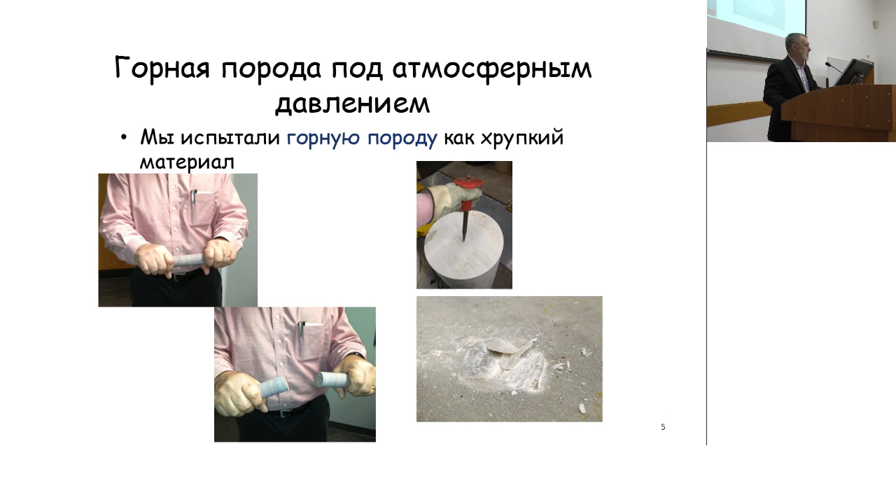One thing we're going to see is that a long time ago people made hypotheses about what happened down hole. They assumed that the rock was brittle, and that was a mistake. Basically, rock is made up of hard grains that are glued together. This is a piece of sandstone, and you can imagine it like taking beach sand and somehow gluing all the grains together. That's what the rock is, a granular material.

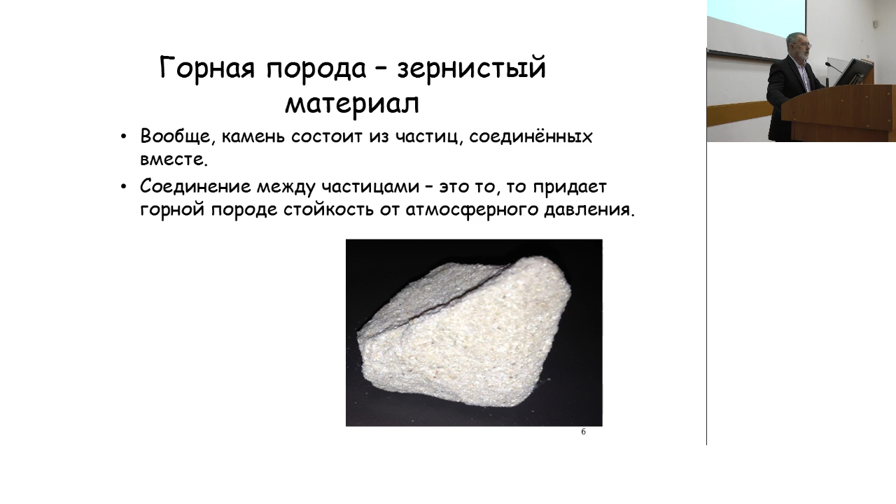There are two basic classes of bits we use to drill rock these days. One is what we call a drag bit, which rotates as shown in the picture, and part of the bit just scrapes on the rock and shears it away. There's an old bit shown on the left, from a little over 100 years ago, and the one from today. The other kind of bit is a rolling cone bit, sometimes called a tricone bit. Those cones are just wheels that rotate freely. As you put a lot of force on the bit, what we call bit weight, to make it drill, that force is concentrated on a few teeth and it crushes the rock.

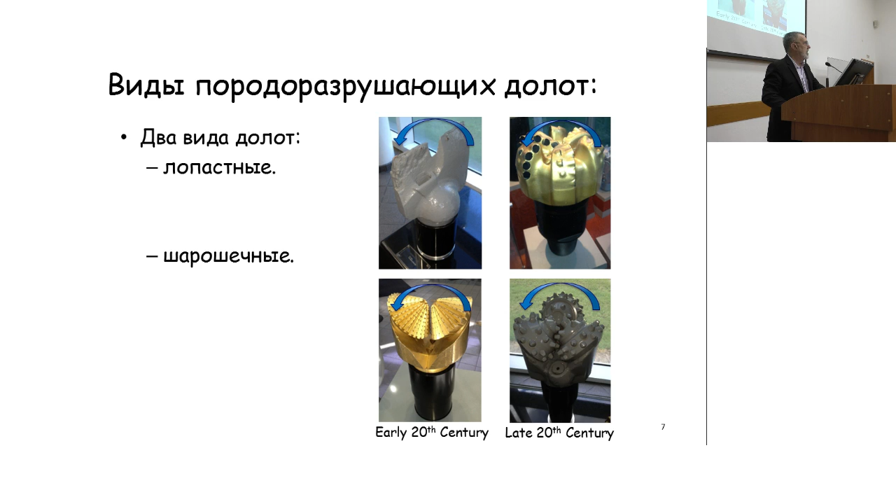So, two kinds of bits. We'll talk about each of them a little bit. Again, the one on the left at the bottom is one from about 100 years ago that a guy named Howard Hughes in the United States invented, and that was the beginning of Hughes Tool Company.

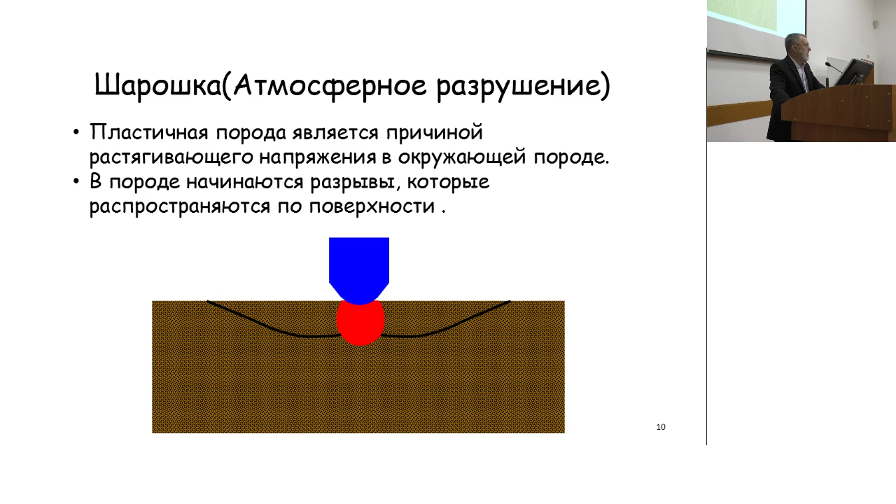Let's think about what would happen at atmospheric pressure if we indented a rock. The blue thing here represents a rock bit tooth, and the brown or amber color represents the rock. As the tooth begins to penetrate the rock, it crushes the rock immediately under it, shown in that red zone. That crushed material is like a plastic material that wants to flow. It has less strength than the elastic material, but it's constrained by all the elastic material around it to keep it from flowing. As we continue to indent, if we get the pressure high enough, it can make a chip. It will drive a long crack that starts in the crush zone and propagates off the surface, and then big chips of rock will fly away. This is what we'd see if we could watch drilling in a laboratory.

This is a picture of a test facility from 1955. Somebody asked me earlier today how I got started in this area, and the answer was that my father had been in it before me. He worked for Exxon and did drill bit research. About the time I was born, two years after I was born is when this picture was taken, but around that time he came to Houston and actually used this very machine and some tests they were doing back then. But that's not part of my presentation, just a personal piece of information.

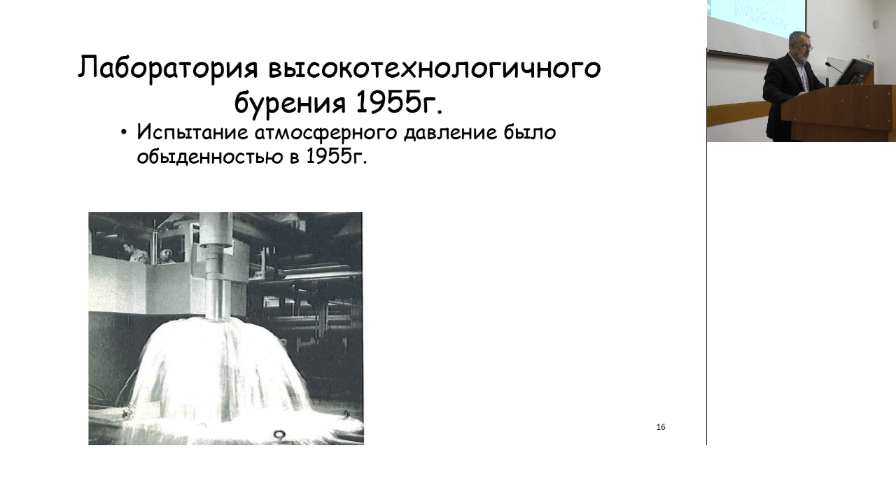I like this picture because it was part of a recruiting brochure from the 1950s where this company was basically saying, look how great we are, we've got this great lab, why don't you come work for us and do research. At that time they assumed there's a big rock down there at the bottom that you really can't see. There's a drill stem coming from the ceiling that you can see, where you can put a bit and rotate it to drill in this big rock. The water all around is to clean the rock. But they assumed that this sort of atmospheric pressure drilling would be representative of what happens down hole.

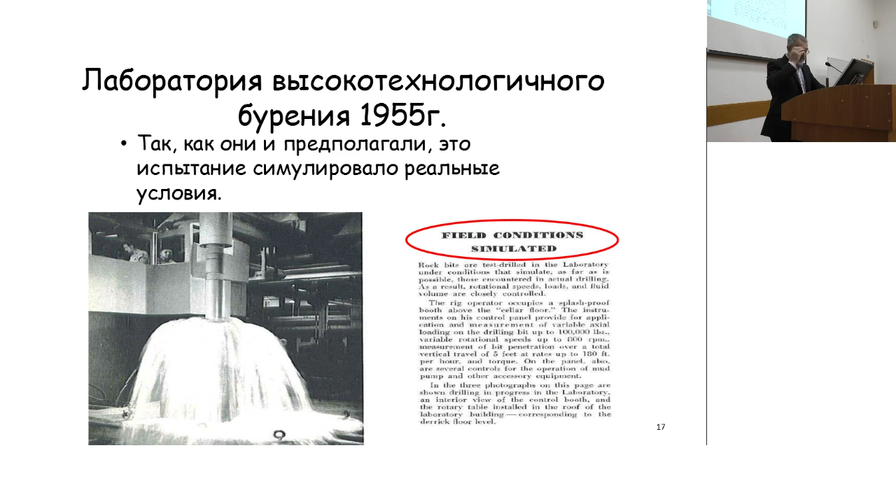If you were to read the English here, the first part talks about how it simulates downhole conditions as far as possible. But about that same time, people began to learn that if you retrieved a core from deep in the earth that you had been drilling, and then drilled on it in the laboratory, it was much easier to drill in the laboratory than when it's deep in the earth. So that raised the question: why is it so hard to drill when it's deep in the earth? That's the mystery I talk about. There's still some mystery left to it. We understand a lot better today than we did back then, but they recognized that the rock was harder to drill if it was in the earth. The question is why? Answering that question is pretty much what I'm going to be talking to you about in this presentation.

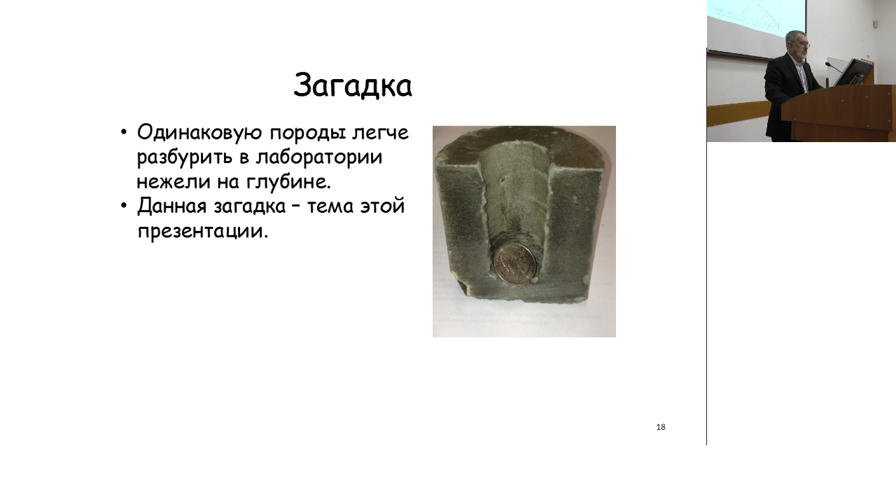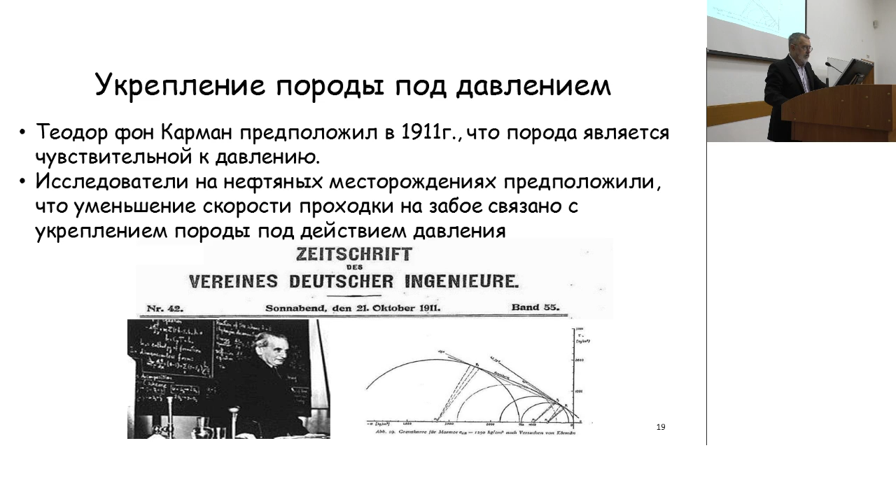Even back then, and way before then, people had realized that rock was a pressure-sensitive material, people who worked with rock. This guy here was one of the heroes that started using this sort of analysis. In the 50s, when the oil field researchers started getting into this, they used this type of analysis to model the drilling. So this is going to talk about some tests that were done.

In 1955, a guy named Bob Cunningham, who I worked for when he was old and I was young, built this machine shown here as one of the first high-pressure microbit test machines. It's because they realized they needed to test rock under pressure to make it act like it is downhole. So he built this machine that would use small bits, as I'll show in a moment.

He actually did tests on it to measure the rate of penetration, meaning how fast you can drill in the rock. And then he also modeled the rate of penetration with the Mohr-Coulomb theory that people were using at that time.

This is a little more information on the test. You can see the microbit at the bottom, that's about 3 centimeters, much smaller than an actual bit, because back in that day... I see that the graph on the right actually has a little bit of a glitch to it, I apologize for that. The brownish looking stuff is the rock, it's kind of removed. But at any rate, we couldn't build huge pressure vessels in those days. Didn't have the money, or I guess the technology. So they built a small version.

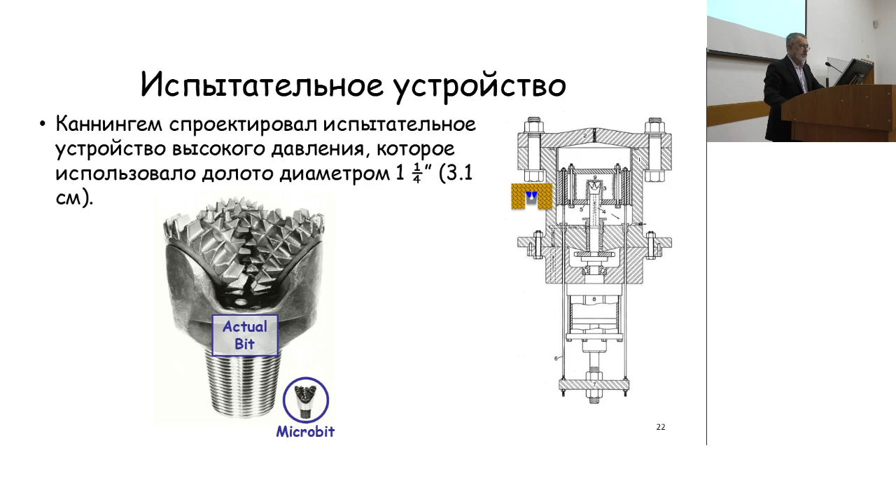They used this Mohr-Coulomb model of a plastic material to explain what they hoped would explain the mystery. I want to take just a moment and talk a little bit technically here about what the Mohr-Coulomb model represents. We can plot it in the space of hydrostatic stress on the horizontal axis and shear stress on the vertical axis, and a circle that has its center on the horizontal axis represents a stress state.

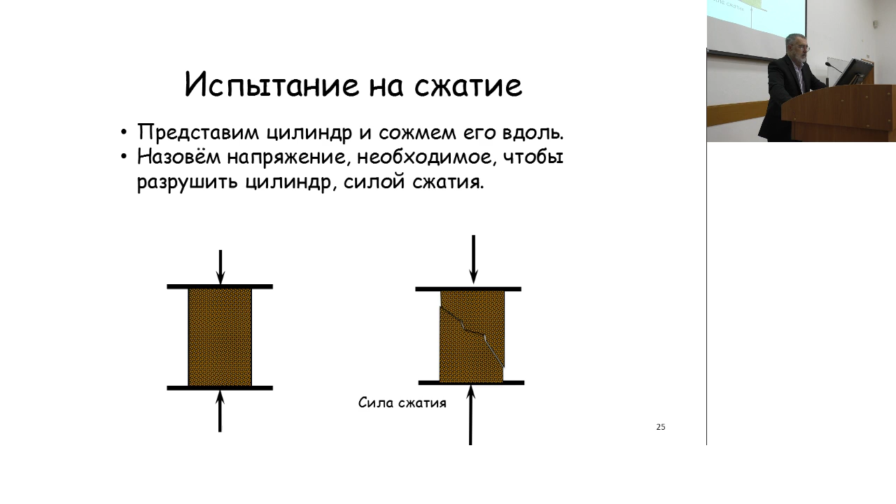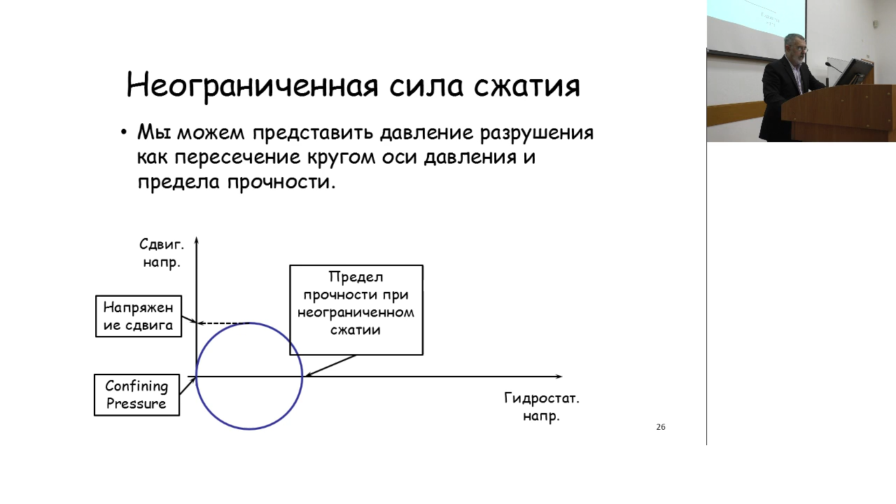Imagine if we did a test where we took a cylindrical rock specimen and just squeezed on it axially, kept raising the pressure until it broke. If we measured the force at which it broke, we'd call that the confining—well, it'd be the unconfined compressive strength in this case. We call it compressive strength, that's the word I was looking for. We can plot that by putting the confining pressure on the horizontal axis and the actual pressure at which the rock fails. Then we can draw the circle in there as I described, and the height of that circle represents the shear stress required to fail the rock. Well, now that was for an unconfined test.

Let's imagine we take the same piece of rock, and this time we put pressure all around it, and then we increase the axial force to find out how much force it takes to fail it. What we'll find is it takes more force to fail the rock when it's under compression.

So we can plot again the confining pressure shown at the left, and the measured compressive strength shown at the right, and the circle a little bit higher than it was is a bigger one, meaning more shear stress is required to shear the rock. And we can even take this to higher pressure, and then we'd find that the rock gets even stronger, and the shear stress required to fail it would be even stronger.

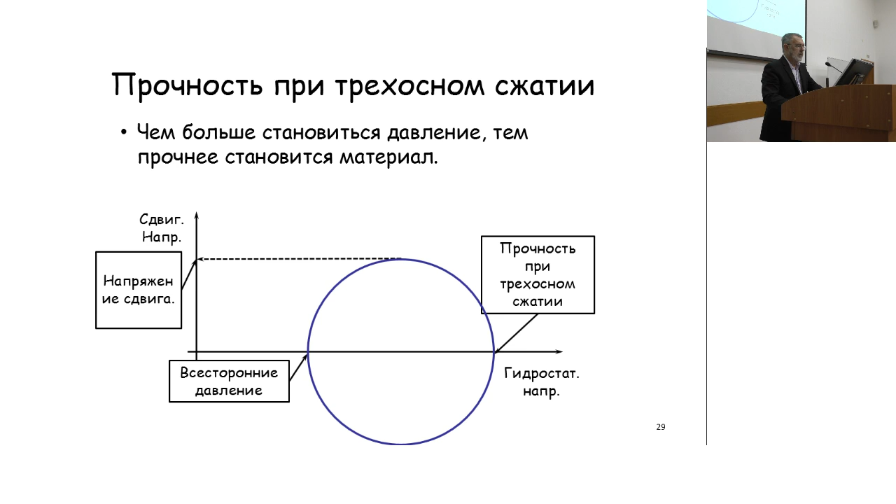So we can do a bunch of tests on pieces of rock at different pressures, and get a circle from each one of these tests, plot the circles together as shown there, and then plot through it what we call a failure surface. What that failure surface means is if the stress grows big enough such that it touches the failure surface, then it's defined to be failure.

And we can put mathematical parameters on this so that we can solve these things mathematically. This is basically the equation that Cunningham used, and I'll show you some of his results. It's still the basic equation that we use today, maybe in a slightly different form. Maybe we use a Drucker-Prager material rather than a Mohr material, but it's a similar sort of thing.

The theme of this is that this model here does not explain everything, and so there's still some of the mystery left.

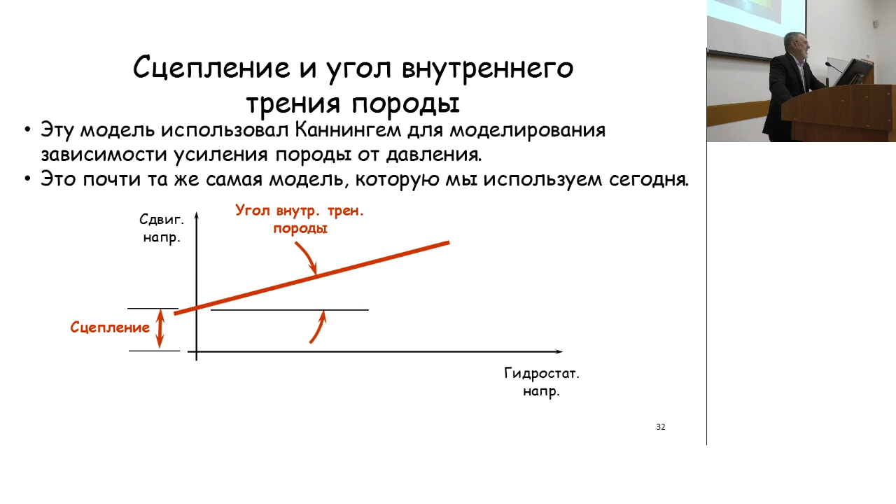If we put a shear stress on this thing and push it, we'll find out that there's a volume expansion as we do. And there has to be, because the grains need to move apart a little bit and move past each other, as is shown by this simple example.

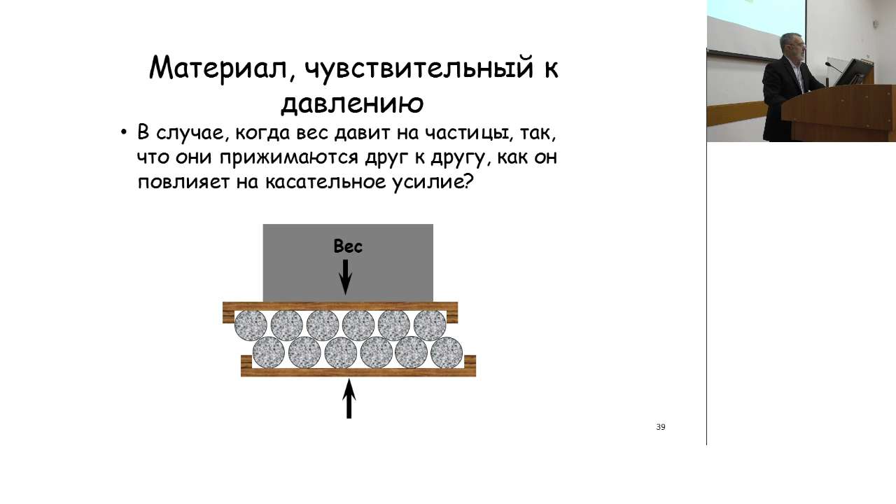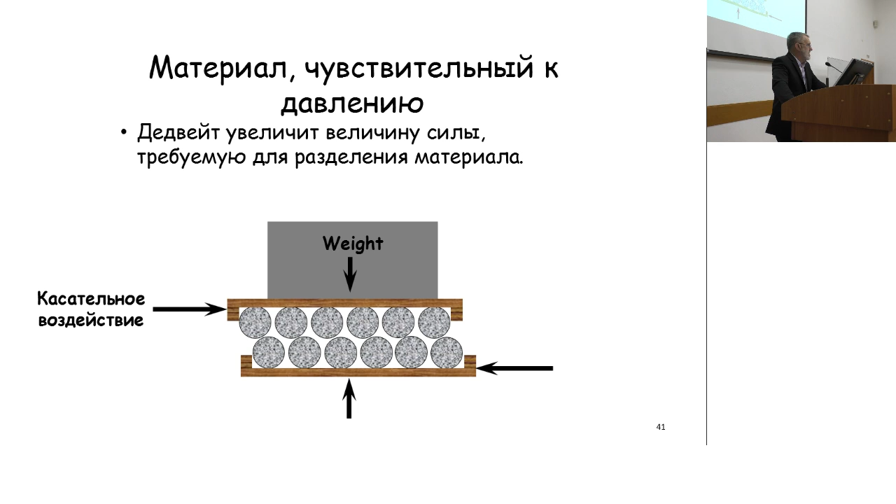If we put a weight on top of this and ask how much shear stress, well, it takes more shear stress to fail it because the weight resists that. But there's still a volume expansion, and the idea that the rock expands as you shear it is going to be really important in this discussion, so you need to remember that.

So this shows that we have volume expansion, and the higher shear... the weight, which it says in English there, is similar to the confining pressure. Remember I talked about doing a test and putting pressure all around it. The weight is like that in this simple example, and the shear force is like the shear force.

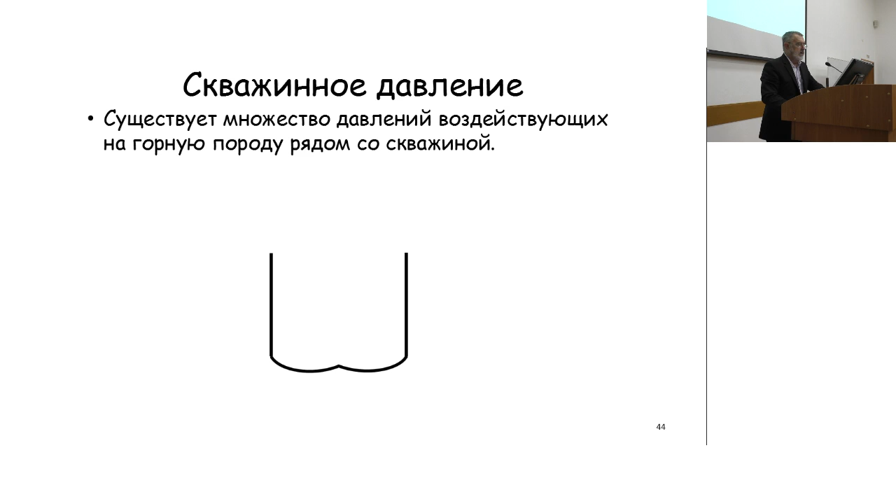So there's a lot of different pressures downhole, a lot of different stresses downhole, and I want to list them here. There's the overburden stress, basically due to the weight of the earth. When you get deep, maybe 3 or 4 or 5,000 meters, there's a lot of weight of the earth above it, pressurizing the rock.

And there's a confining pressure, people usually call it. It's a lateral stress that's usually somewhat less than the overburden pressure. Then as we drill the hole, we fill it up with mud, and the mud is very heavy, made so on purpose, so that the gases and things in the earth won't blow out. It keeps everything together, but the mud is usually lighter than the overburden pressure. And finally, there's the pore pressure.

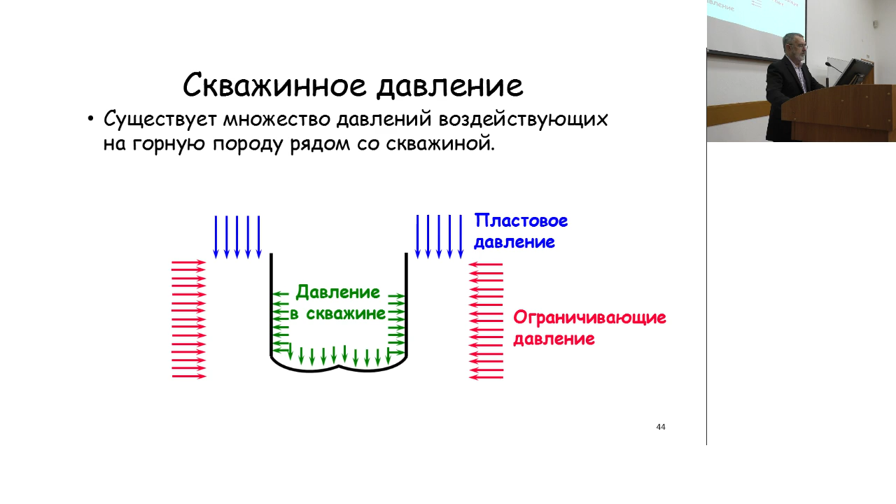So there's all these different stresses, and the question for Bob Cunningham back when he did his first research in the 50s, is which of these pressures governs the rate of penetration. They did a lot of tests with that microbit rig, and they varied each of these independently, and what they found was that what they called the differential pressure is what governs how fast the bit drilled. The differential pressure is the difference between the borehole pressure and the pressure in the pores.

As the differential pressure gets high, the rock becomes more difficult to drill. Now, many rocks are permeable, meaning fluid can flow into the rock, and we don't want that to happen in the earth. We want the fluid that we put in the borehole to come back out of the borehole, not go into the earth.

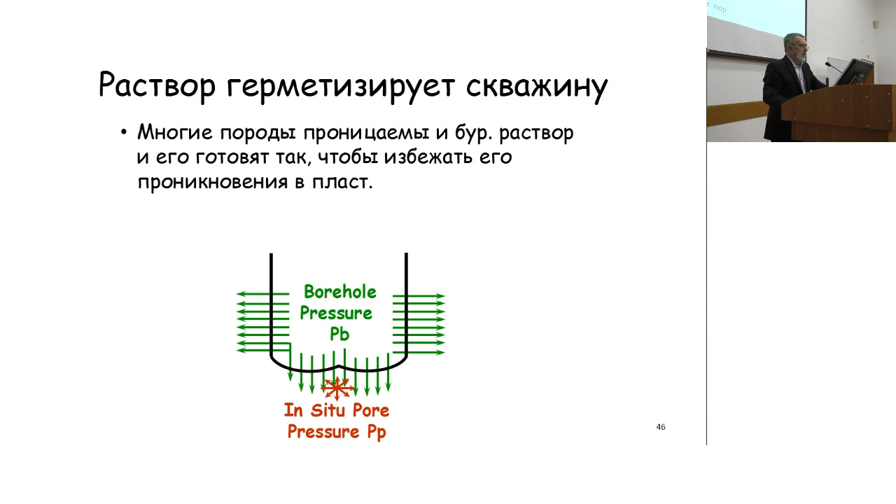So we formulate drilling muds such that they inhibit that, and they form a filter cake around the edge, sealing off the permeable rock to prevent drilling mud from going into the formations. That's very necessary for drilling, but it also turns out to be detrimental for the process of failing the rock, as we're going to discuss in this lecture.

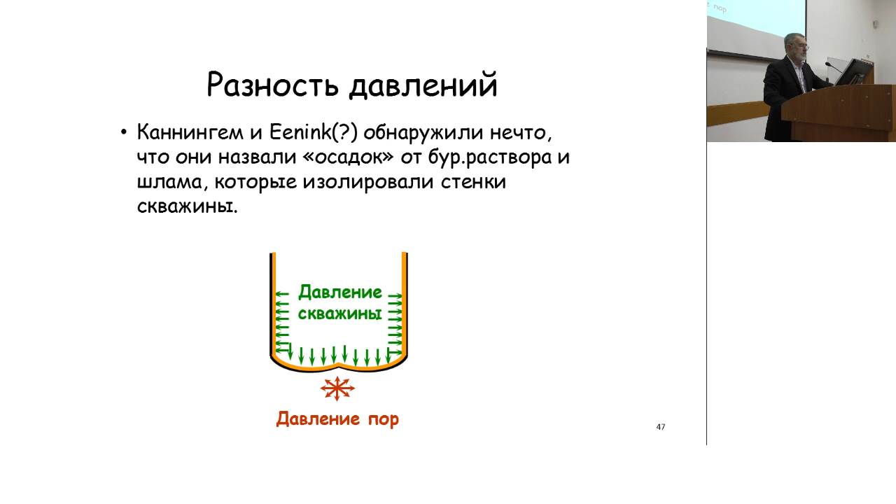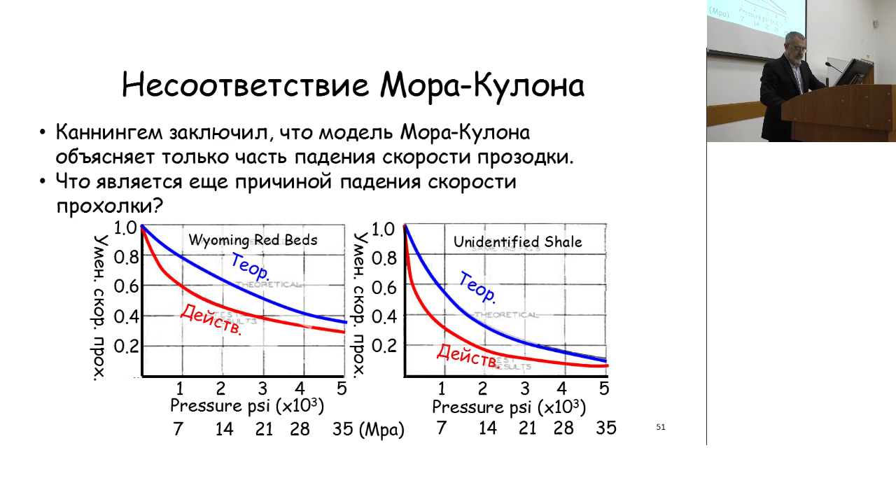That's the drop, and you can see it in red there — that's what they actually measured in their test machine. But the theory, the Mohr-Coulomb theory they were using, didn't predict as dramatic a reduction in rate of penetration as they actually measured. That raised the question of why. Cunningham ended his thesis basically pointing this out, making the observation that the Mohr-Coulomb model only explains part of what's going on. There's something else going on that remains a mystery.

At that point, a lot of researchers around the world — SPE already existed in that day — and all these researchers would publish their data in SPE papers so they could share the data. At any rate, a lot of people started working on this problem.

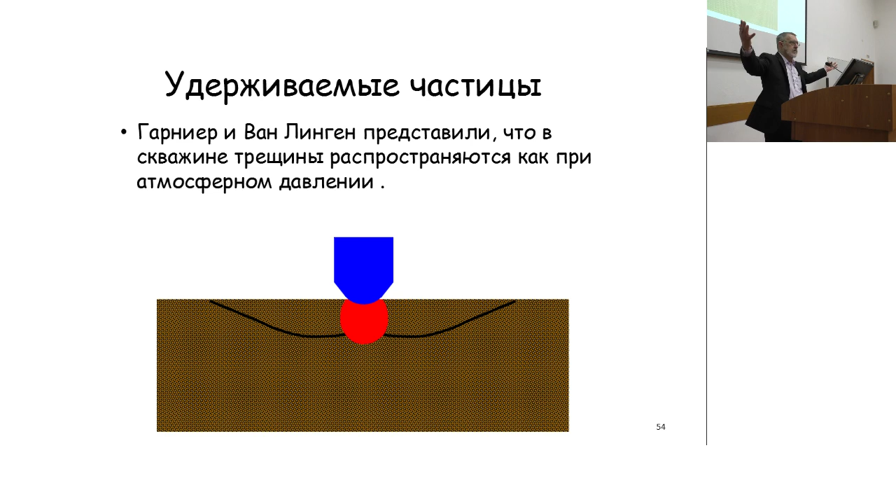Here's a couple of guys who tested in 1958. They built their own microbit rig, wanting to find out what's responsible for the increased reduction in rate of penetration. They came up with a theory they called chip hold down. They imagined — and this is where I think they went astray — that under pressure a long crack grows like it's shown in that image there.

But under pressure the chip can't go anywhere because there's fluid pressure holding it down — like the borehole pressure, with a filter cake shown there. If there's high pressure on that chip, it'll be holding it in, and if we're talking about pressures of 100 megapascals or so, there'd be a tremendous force holding that chip in place. So they call it chip hold down.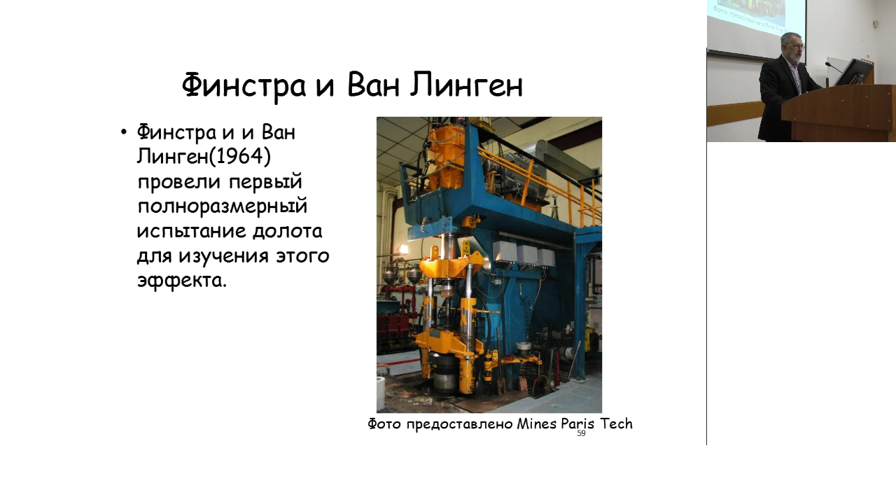Then another researcher began working in the 60s using the first full-size test facility. In this facility, they could put a full-size drill bit, put a relatively large core of rock in there, pressurize it, and drill on it. Today we have machines much bigger than this, but this was for their day.

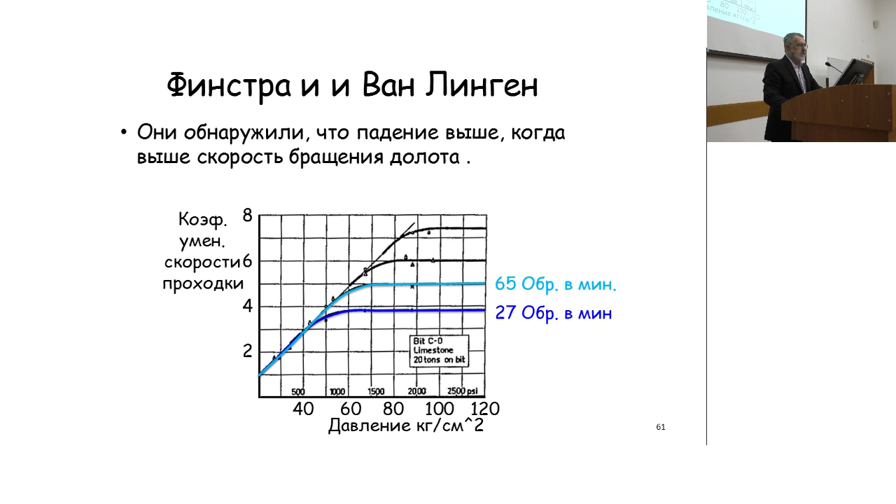They found that the rate of penetration reduction was rate sensitive. Here we have pressure across the bottom, and the vertical axis is the rate of penetration reduction. What they found is if they did a test at 27 RPM, starting at zero pressure, you see the pressure rising as you move to the right, but it reaches some limit and stabilizes at that point. They found that if they go to a higher RPM, it would follow the same path of increase and reach some other highest value, and similarly on up to 315 RPM.

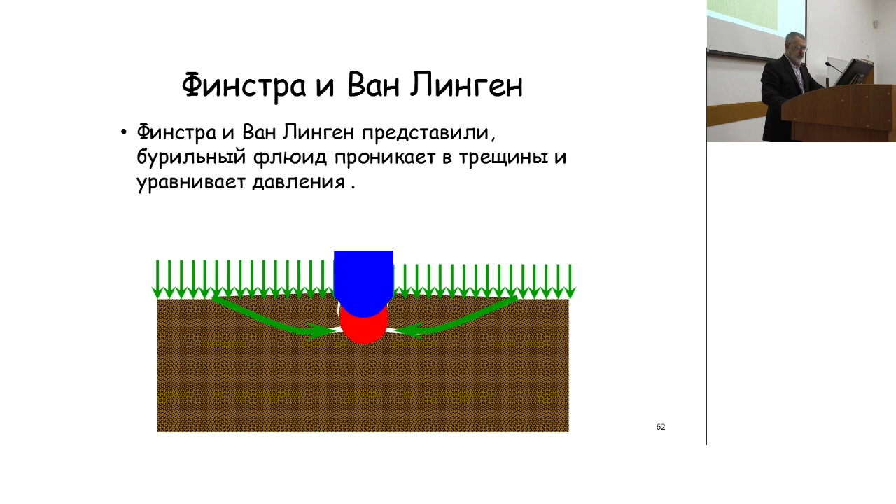When people started studying drag bits, which would have been a few years after what I've been talking about, they noticed that drag bits, shown here as a diamond cutter moving from left to right, with the brownish or orange material being the rock.

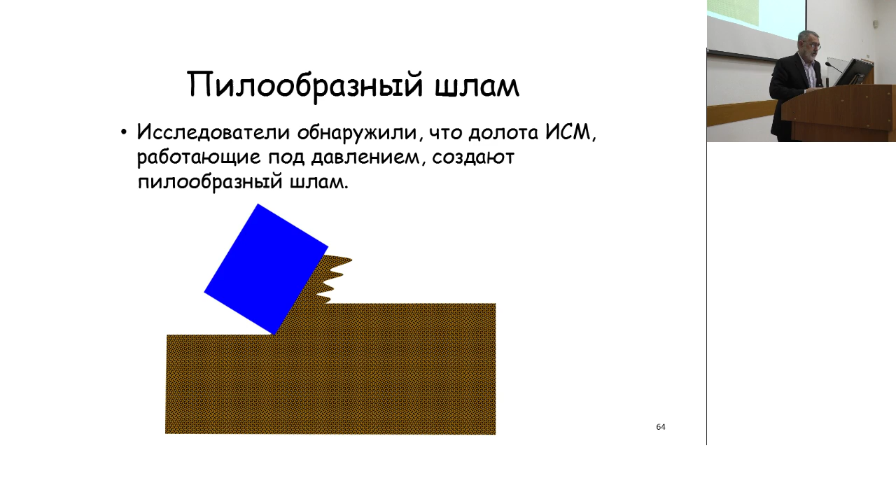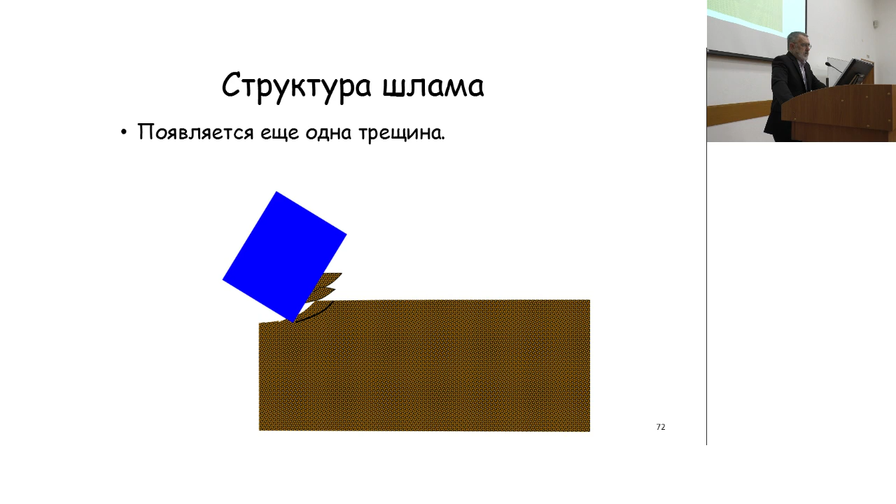People assumed, and I was involved in it by this time, this would be the 1980s, that as we cut with a drag bit, we're doing something over and over. We're driving a long crack, like shown there, and then that chip moves up a little bit, and the cutter advances, and we drive another crack, and it moves up a little bit. So you get a stack of chips of rock. That was the hypothesis, and people believed that for quite some time.

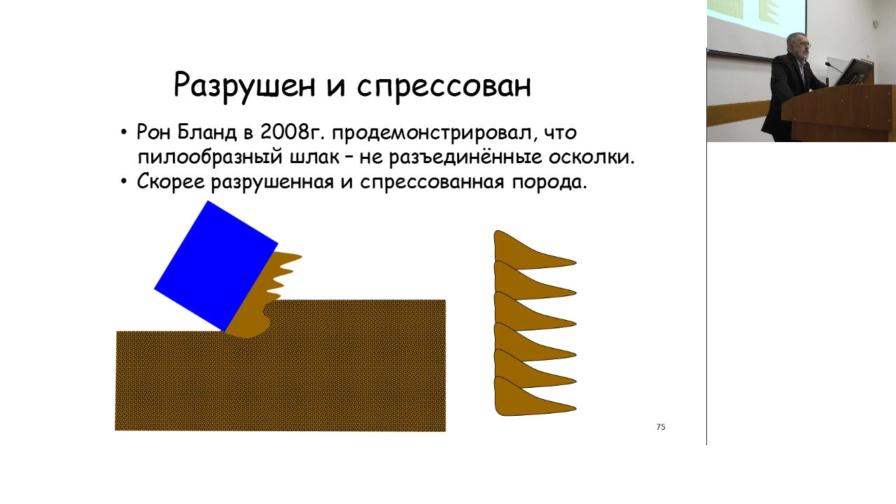But back, actually not too long ago, about 10 years ago now, a guy named Ron Bland discovered that there's no stack of chips. The material is entirely crushed and extruded. So I've changed it to a tan color there to represent the crushed area. As the cutter moves from left to right, we crush all this and then extrude it up in that direction, and it comes out in the sawtooth shaped type chip.

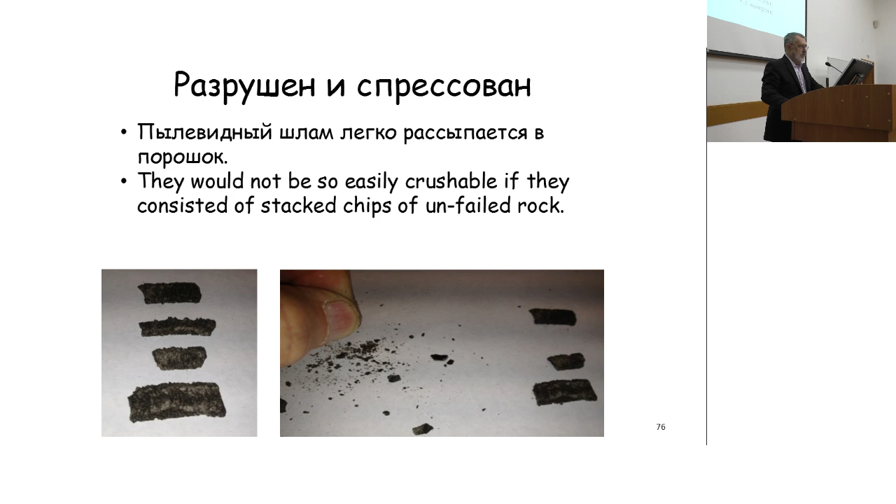One simple way we know this is you can take these cuttings after they're made and grind them up in your finger. If there were stacks of chips of unfailed rock, you wouldn't be able to do that - you'd break it into the stacks, into individual chips. But it breaks into small material, and Bland quantified this for both tricone bits and PDC bits and showed that they both crush the material entirely.

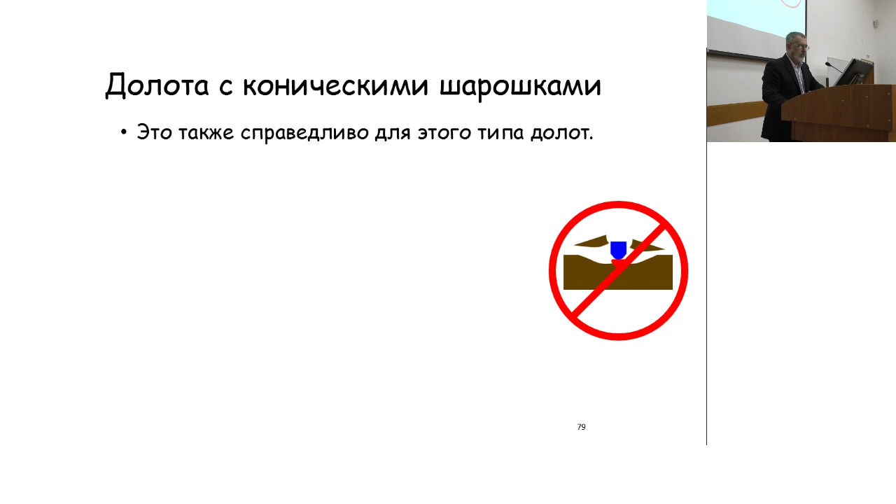So this is not what happens here - this sort of brittle failure that we might think about with rock, long cracks being driven in it and big chips coming off - but rather there's a crushing and extrusion type process that goes on. And that's true not only for drag bits, but for rolling cone bits too. As shown at right, as a cutter goes in, it actually crushes a large volume and extrudes just a small part of that.

More recently we've done analysis of this, and this is an image from a discrete element analysis. Maybe you're familiar with that, but the amber colored balls, or orangish color, are representing grains that are glued together. In the mathematical model, they have a tensile strength - they're glued together.

Then the cutter, there's a cutter on the left that will be advancing. The amber balls, as I said, represent the original rock that's glued together, like I said in the first or second slide. These blue balls - the cutter is advancing, and it's breaking the bonds in the amber balls. Once a grain of the amber has broken all of its bonds, the computer changes the color to blue, so we can see what the crushed zone is. The blue is the crushed zone.

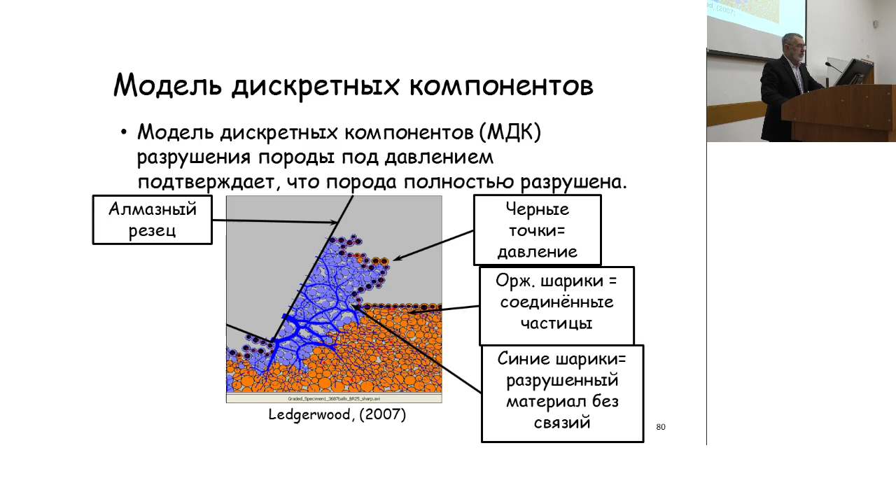The black dots represent the pressure boundary condition - that's actually a relatively complicated thing to know where the pressure is applied, but there's pressure being applied not only to the rock, but also to the cutting that's extruding up there. Finally, there's a PDC cutter moving from left to right in this image. The same thing happens with modeling the tricone type cutter - you can see a large volume that's crushed, and only a very small part of the rock that's actually removed in the indentation process.

When we set up a model like this, we know the rock properties. We can take a rock and do a test, and that would be the properties of the amber colored balls. We know the mechanical properties of the cutter, but this blue material is a third material whose mechanical properties we don't know. If we go with our gut, we'd say the blue material is probably relatively weak because it's crushed rock, just like a bunch of sand. But that's where we'd be wrong if we assume that.

The slides going forward actually show that in English, though I guess it'll revert to Russian as we go on in a moment.

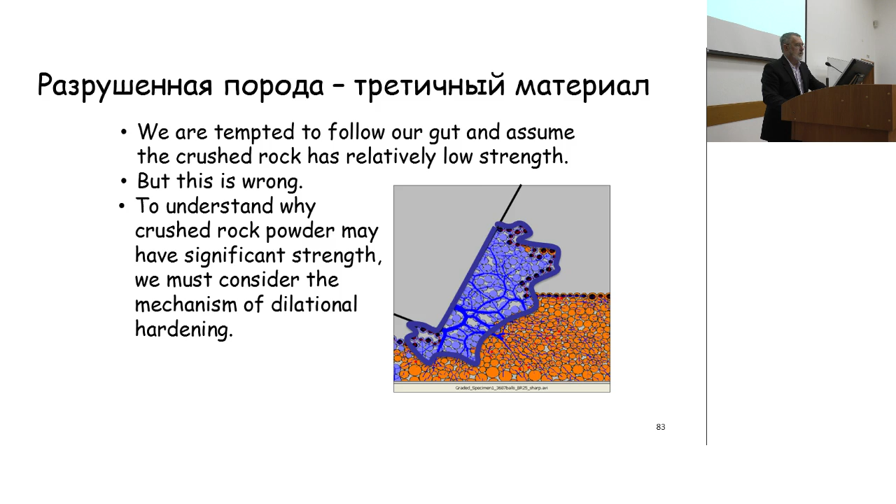In order to understand how the crushed material can have strength, we need to talk about dilational hardening. Dilation means something dilates, it expands. Remember when I talked about a rock, if you shear the rock it expands. Hardening means when the rock dilates, it makes it appear to be harder.

In this picture, the blue is a drag bit moving from left to right. The little fish in it is unfailed rock. There's borehole pressure and pore pressure. Remember that the difference between those two is what strengthens the rock itself.

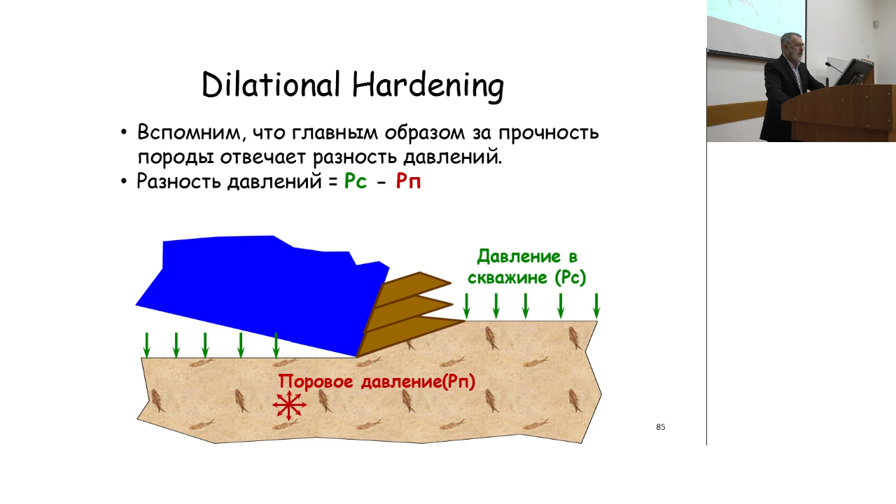But we're interested in the strength of this material in the crushed zone. What is that, and there's a pore pressure in it. So we really need to talk about the differential pressure between the borehole pressure and the pressure in the crushed zone as the pressure that strengthens the cutting.

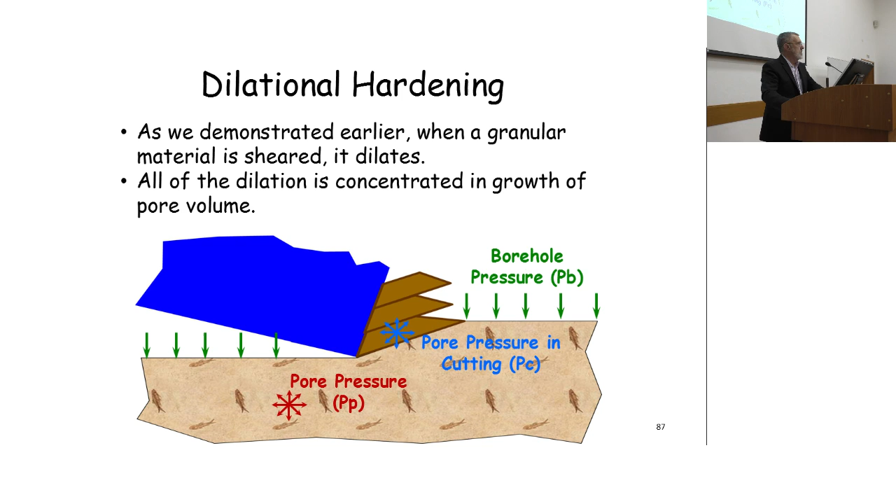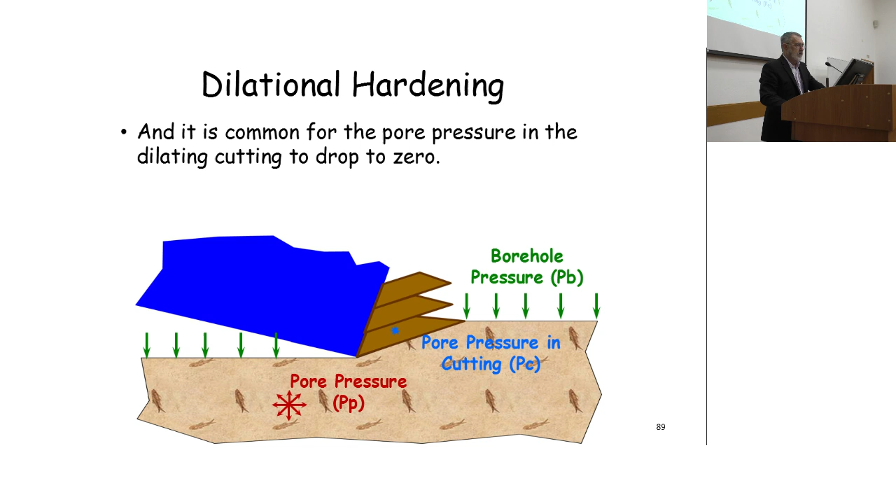So go back to the idea that as we shear the rock, it dilates, and all the volume expansion happens in the pores. The pore size is growing quickly, and as we do, we drop the pressure—you see the blue arrows getting smaller. It's been shown that we frequently drop the pore pressure to zero in that area due to the dilation that happens when you shear it. So the differential pressure in the cutting is the borehole pressure minus zero, which is basically the highest it can be, strengthening the cutting.

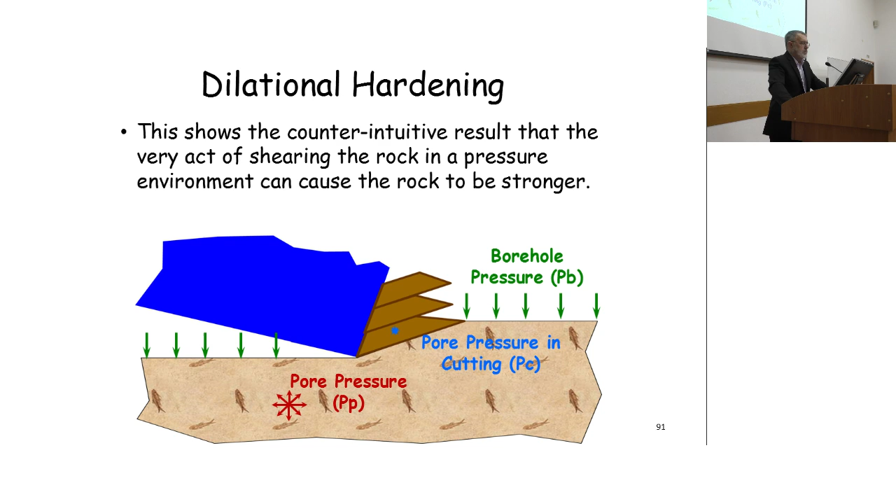This shows the counterintuitive result that as we shear the rock downhole with pressure, if the mud is right, as we'll see in a moment, it makes it very difficult to drill.

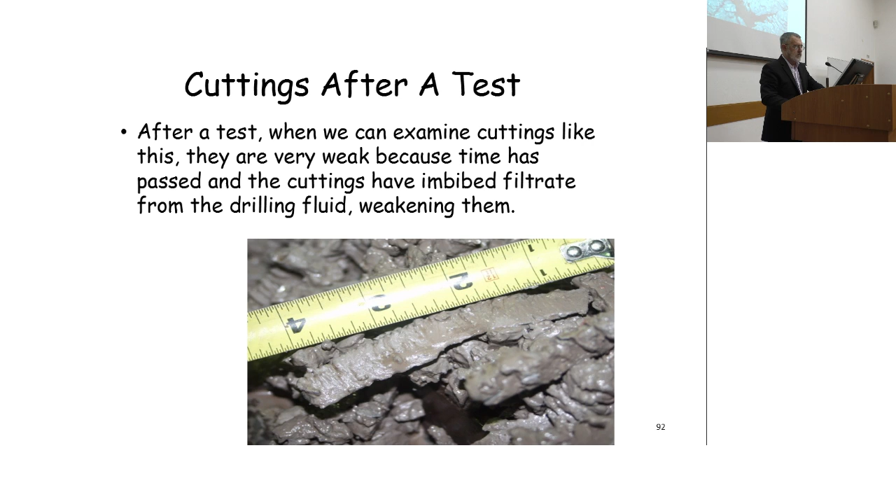If we take the cuttings after a test, as shown here—this is some shale cuttings—if we had some to play with, we'd see it's squishy. It's real weak, as we'd expect it to be weak. And we're tempted to imagine that's the same kind of strength it has downhole, but that's not the case.

If we want to evaluate the strength of the cutting, we can't use the cutting like shown in the previous slide, because that cutting was formed during the cutting process, then the test was depressurized and opened up, somebody got the cutting out, and several minutes passed, and a lot of fluid has gone into the cutting, making it weak. So by the time we can look at it, it's already weak.

So we really need some way of investigating the strength of the cutting at the instant it's created, because it only has strength for a very short time at that instant. The reason it has strength for a short time is because as time passes, fluid can get in there and raise the pore pressure on the cutting, weakening it.

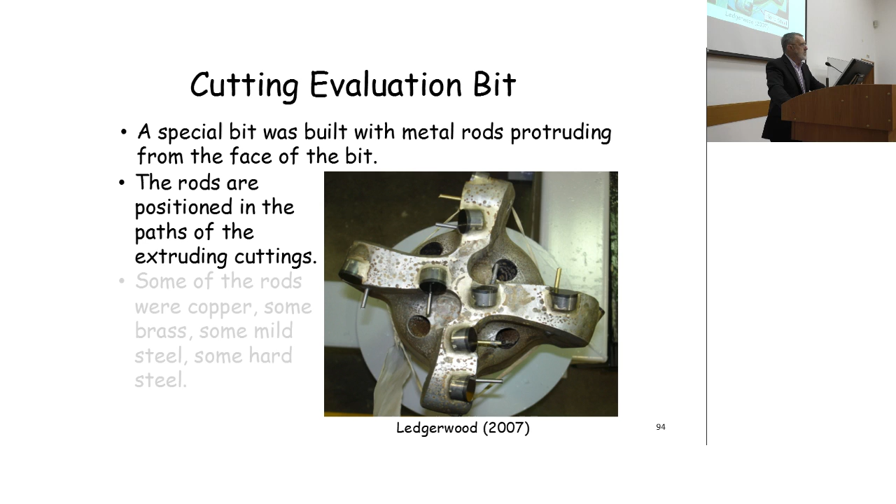So we built a special bit to try to get a handle on this, shown right here. It's built with metal rods protruding in the path where the cutting is going to flow. We made some of the rods of copper, some of bronze, which will be stronger, mild steel a little stronger, and then hard steel, which is the strongest. We wanted to find out which of these the cutting would be able to bend. We actually had a whole bunch of weaker rods too that we were going to test.

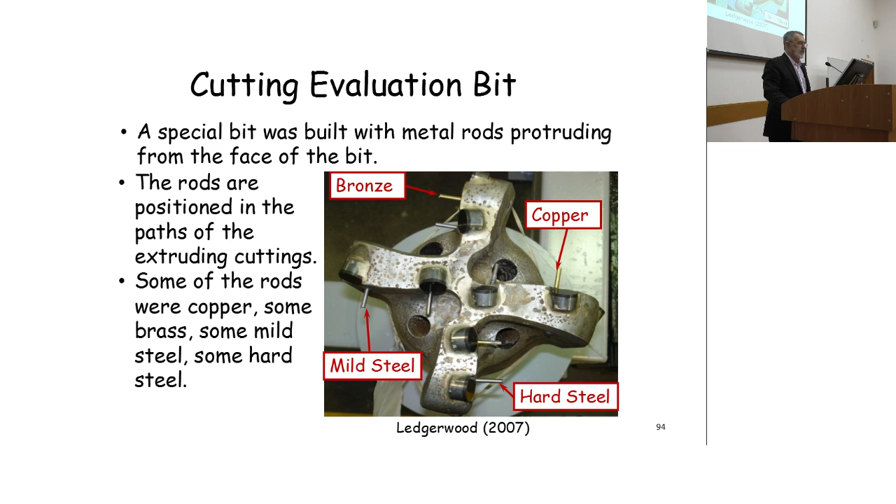If we could find out which rods it will bend and which ones it can't, we get an idea of the strength of the cutting at the instant it's created. In tests of Catoosa shale, which is not a very strong shale, the cuttings bent all of the rods. Let me color the original position of the rod in red, and the deformed position in green. In the left image, you can see the cutting grows normal to the surface, so it's actually bent in the right direction for the cutting to be bending in.

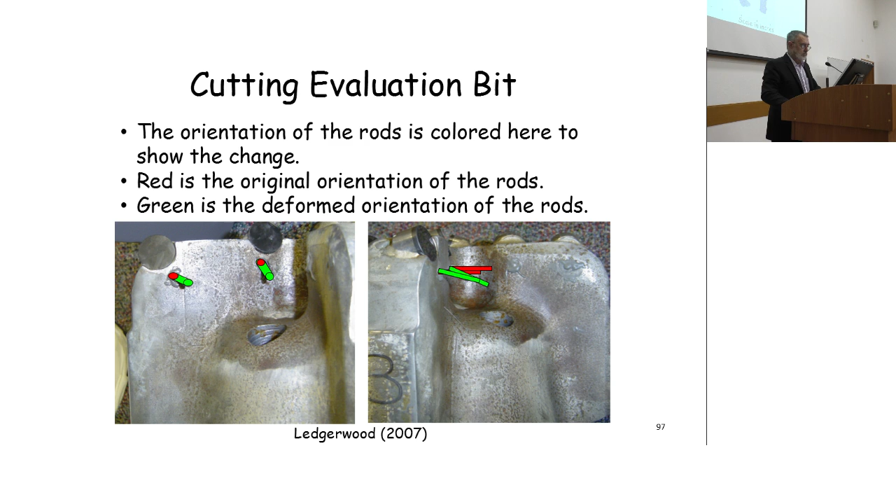We can't calculate exactly with such a crude test what the strength is, but we can make crude calculations, and we find that the cuttings, at the instant they're created, have a strength that's on the same order of magnitude as the rock itself. So it can be very difficult to shear.

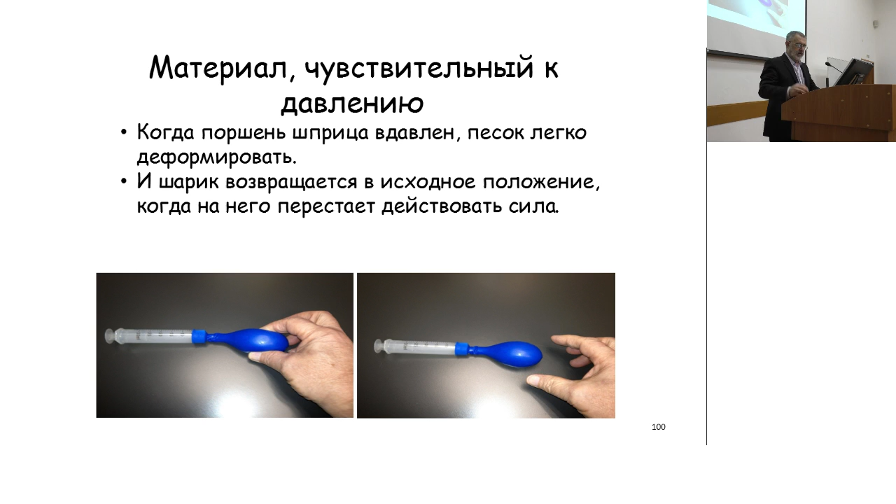I have another toy I like to use. I wish I had it here to demonstrate how crushed material can have some strength. This is a balloon filled with sand connected to a syringe. You could squeeze the balloon, and when the plunger of the syringe is in, you'd find it's very easy to deform the sand inside the balloon, and when you take your fingers away, it returns to its original shape. But if we pull the plunger out to pull a vacuum in the pores between the sand, then it's very hard to deform it with our hand, and once we take our hand away, it maintains the deformed shape.

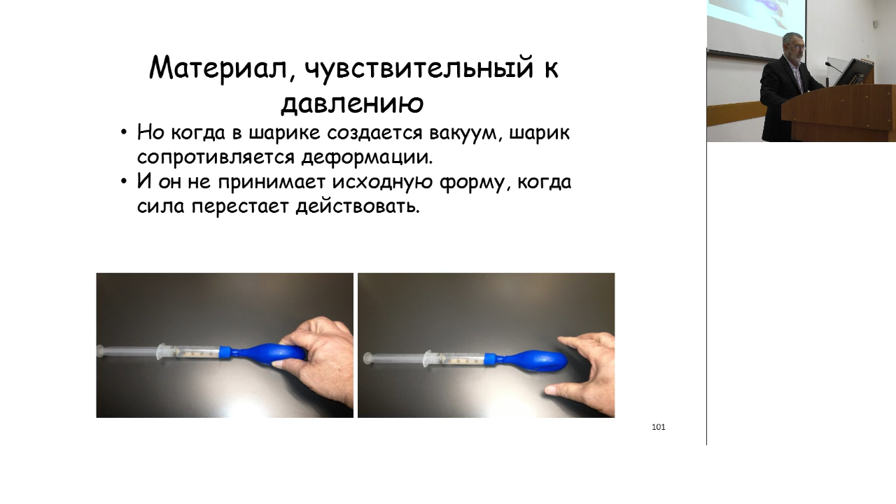Imagine if we could take this test to the bottom of the borehole where we had maybe 700 atmospheres of pressure, and if we could squeeze on it, I suspect we'd find it would be impossible to squeeze. It would be extremely strong, but we can't experience that personally. Maybe that's what that slide right there says.

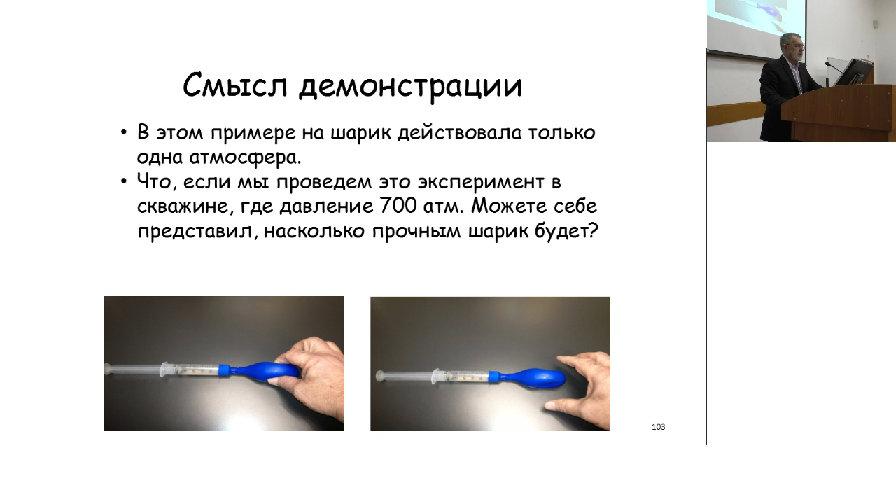The analysis showed that most of the energy in cutting actually goes into deforming the crushed material, not into breaking the original bonds. So it's not so much the strength of the original bonds, it's something about the crushed material itself that makes it hard to shear.

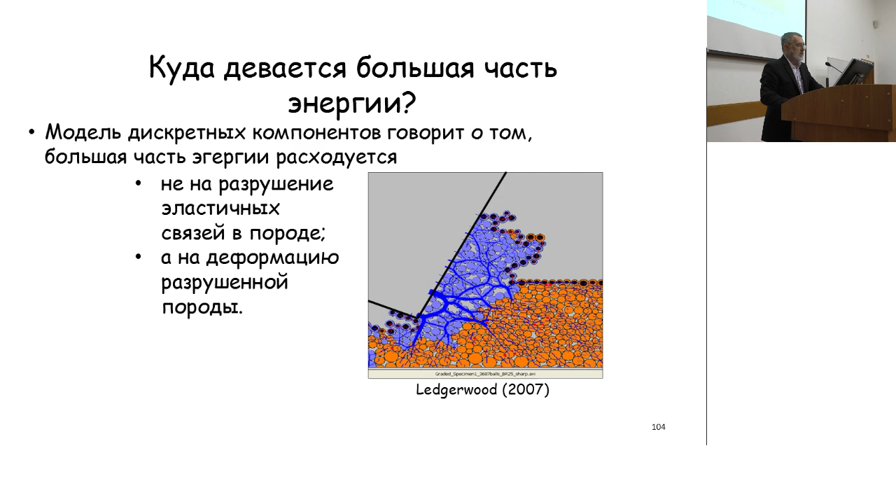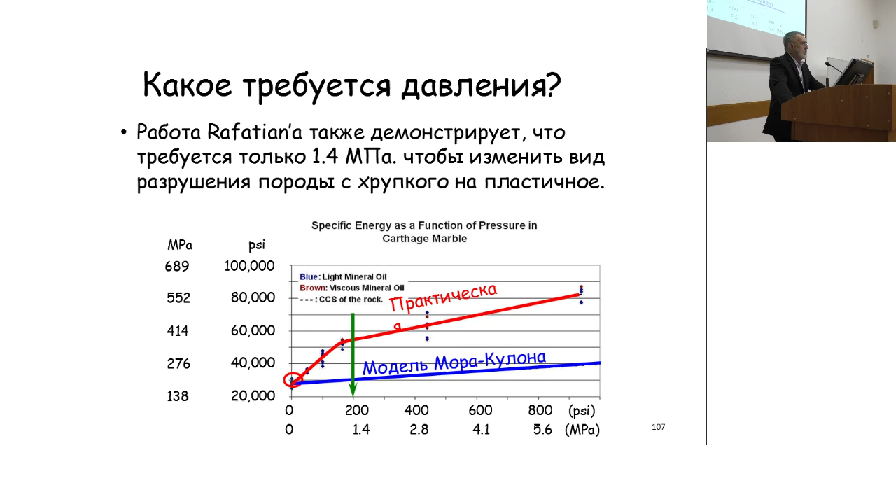The important thing about Rafatian's work, and why I wanted to show it, is he showed that the rock material becomes significantly stronger at a relatively low pressure. At 1.4 megapascals, the material has already got its strength. So it doesn't take a lot of pressure to change rock from a brittle material to a ductile material.

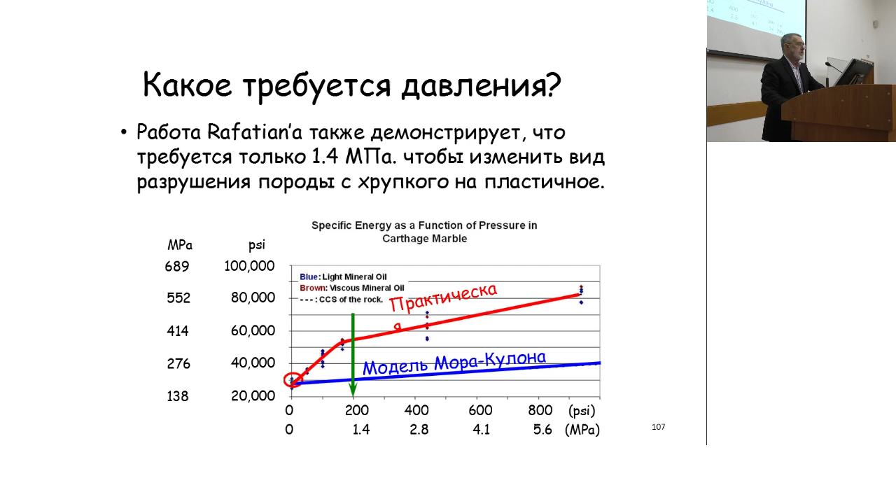Now we've made a lot of points. I want to review them here to get them all in our minds before we go ahead. First of all, at atmospheric pressure, which is the way we normally experience rock, rocks are brittle and they form chips of rock that fly away. But when the confining pressure is higher than the pore pressure, the rock becomes ductile and we crush it and we extrude it.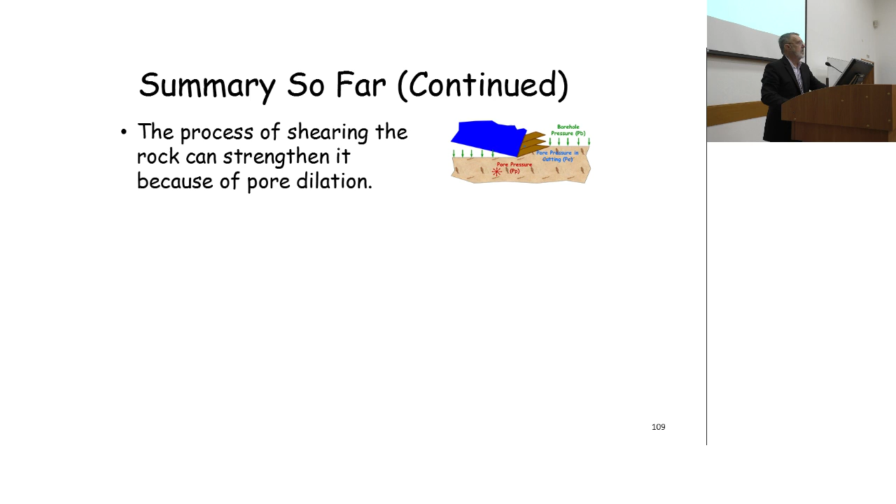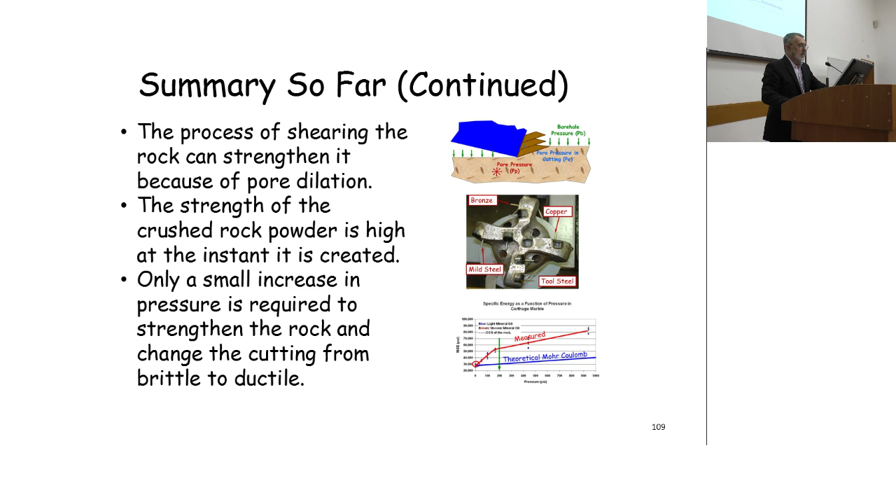The thing that governs the strengthening of the rock is the differential pressure, the difference between the borehole pressure and the pore pressure. We've shown that shearing the rock can actually make it stronger because it dilates the rock, which drops the pore pressure and increases the confining stress on the cutting. We've also shown that the strength of these cuttings is high at the instant we make the cutting, and that it doesn't take a lot of pressure to cause the rock to be ductile. Finally, most of the energy expended down the hole goes into extruding the crushed material, not into breaking the original rock.

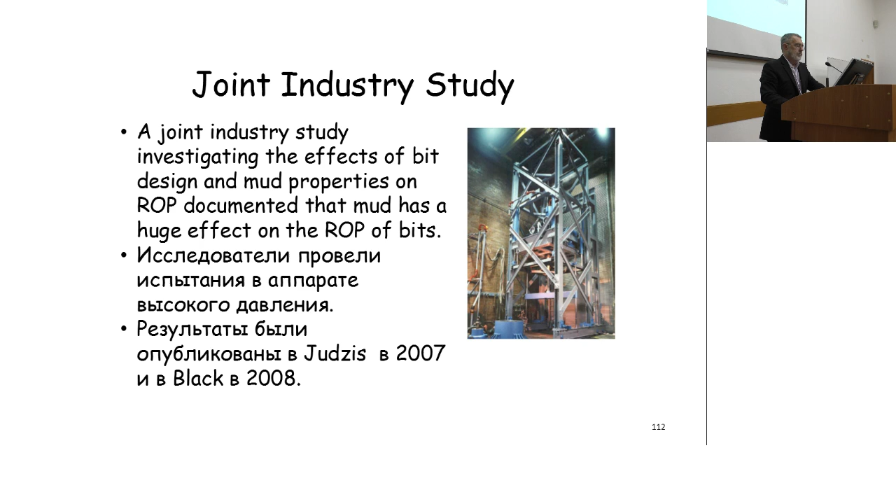So mud is very important, and I'm calling it a co-conspirator here. I want to talk about some tests done by a joint industry group, reported in a couple of SPE papers, shown with the name and date - you can look those up if you're interested in learning more. These tests were done by a group of companies together using a full-size test facility where we can put a pretty large bit and pretty large rock inside of it.

What they're going to change is the drilling fluid - they use clear water for a mud, then a clear base oil for a mud, then a weighted mud at 1.32 specific gravity, which would be about 30% heavier than water, maybe 50% heavier, and then a 1.92 specific gravity oil-based mud.

So the question is, does changing the mud change the rate of penetration? Here's the answer. These are plots of data from Carthage limestone, one particular rock. The green plots show the rate of penetration using clear water as a drilling fluid - at 67 kilonewtons of bit weight, they got about 9 meters per hour of rate of penetration.

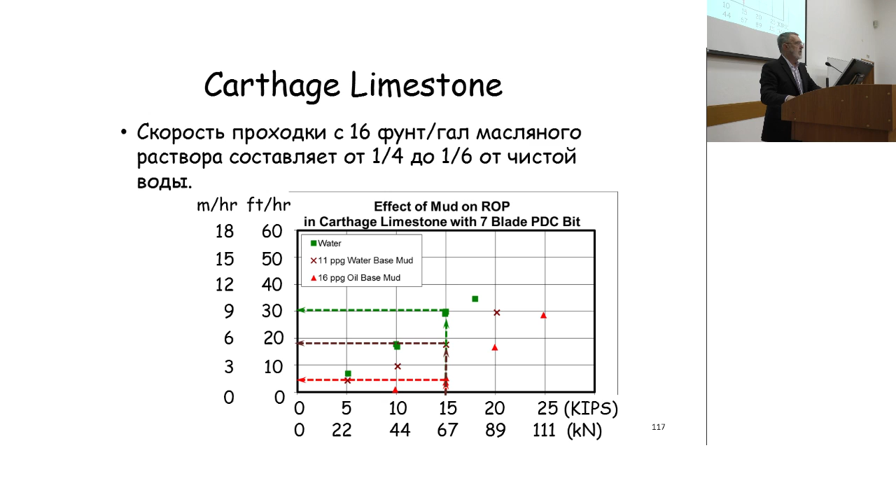This is similar data for another kind of rock, Mancos shale. We're comparing the base oil versus the oil weighted with weighting material. For the base oil at 67 kilonewtons, they got almost 24 meters per hour, but by weighting it up, making the mud heavy, it's only about 5 meters per hour. You might ask why make the mud so heavy - you may have really high pressure gas down in the earth, and you need high pressure in the borehole, so we make the mud heavy to hold things together.

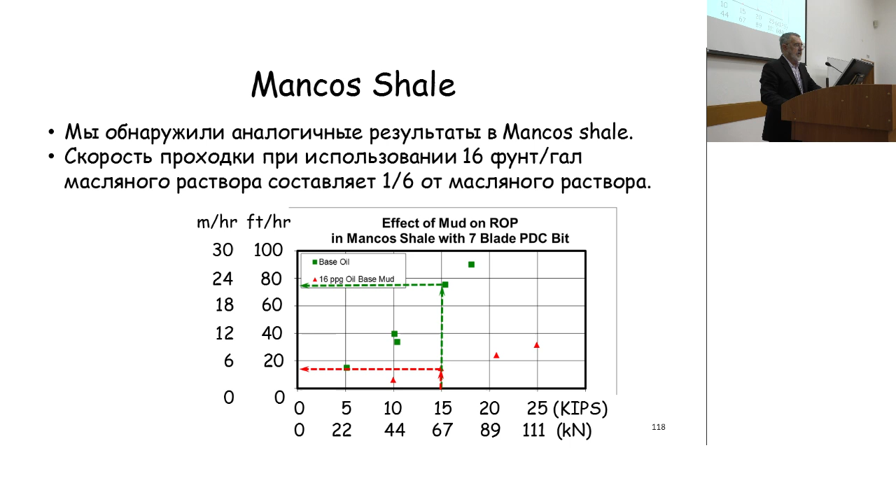This is one last example, Crab Orchard sandstone. The first was limestone, the second was shale, this is the sandstone, and you can see the results for clear water, a water-based mud that's a little heavier, and an oil-based mud that's even heavier.

So a very dramatic change in that. We're almost not drilling at all in the case of the heavy oil-based mud. So the question is, why would the mud properties have such a big effect on the rate at which we can drill, as shown here?

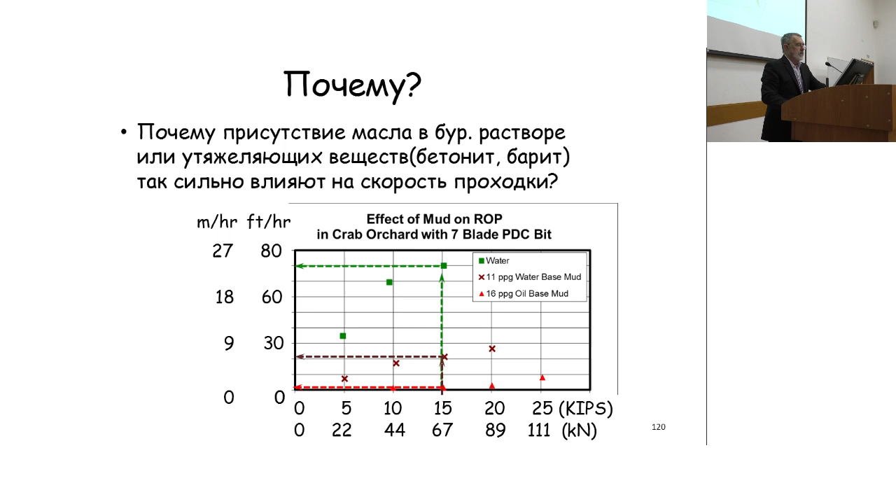We think the answer has to do with how much the fluid can invade the cutting. Shown there in green arrows would be the borehole pressure all around the cutting, and then of course there's a pore pressure. If the fluid can get into the cutting on a time scale of drilling, which is a pretty short time scale, then we'll weaken the cutting and it'll be very easy to drill.

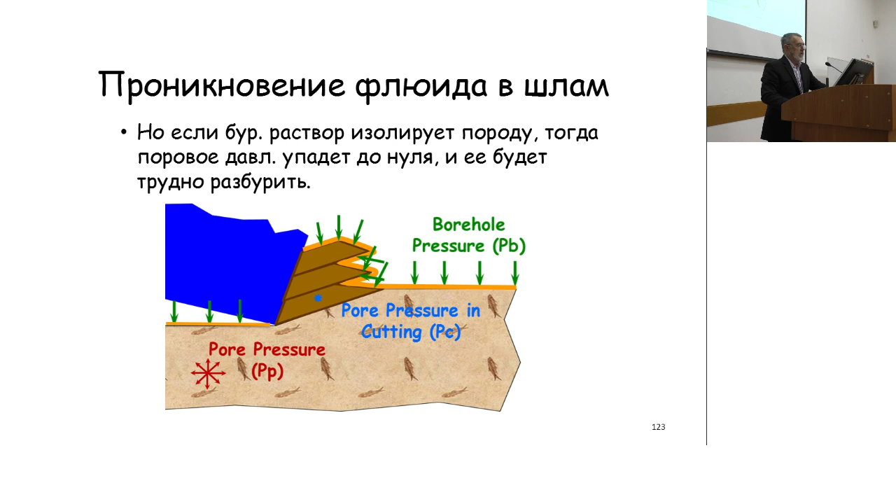So like with clear water, the fluid can get in there and the rock is easy to drill. But if we make a heavy mud, then that creates a filter cake on the cutting itself, and strengthens the cutting, and the cutting will be very difficult to drill. That's a current hypothesis, let's say, as to explain why the mud has such a profound effect.

So what does all this teach us? One is that we need to make sure that our models are appropriate. Engineering is all about coming up with a model, whether it's a mental model or a mathematical model or something like that. But the model needs to be similar enough to the thing we're interested in to be of value for us. I've shown you that a long time ago people had a mental model of rock under pressure as driving long cracks and making big chips, with the chip being held down. But that was the wrong model.

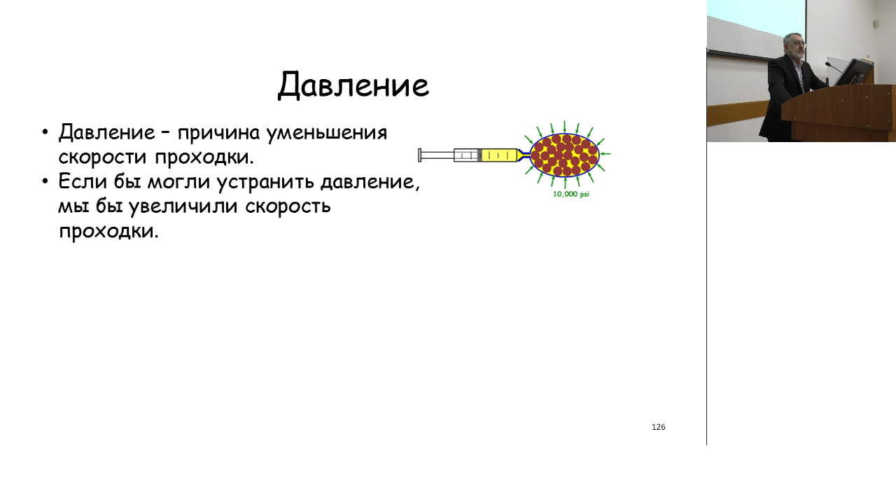Another example of that is a long time ago, one company built what they call a pressure fluctuating tool. If we imagine a deep well there with a high pressure in the well, what they found is if we vary the pressure between 0 and twice the value, then the drilling will be fast, like the pressure was 0.

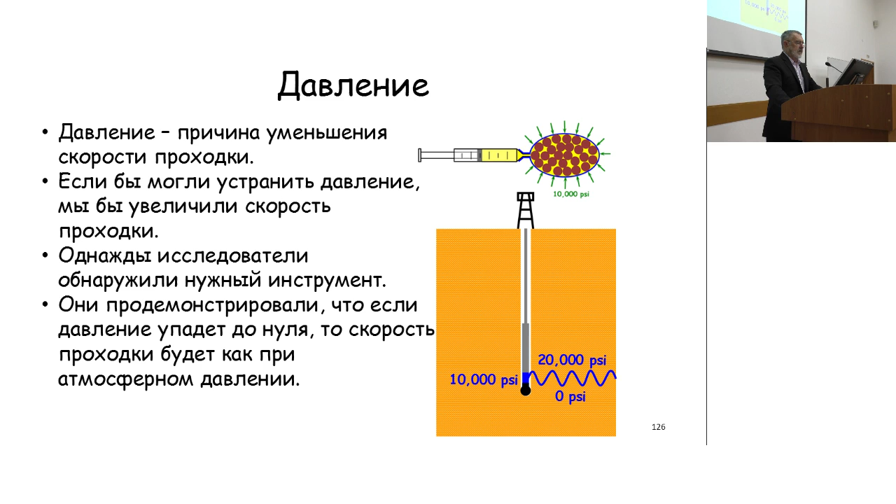So apparently the pressure doesn't have to be 0 for a long time. They weren't able to make this pressure fluctuating tool work reliably in the field, and that's why it's not used today. But it was shown that if you can vary the pressure and make it drop to 0 periodically, the bit will drill fast.

We've shown that the mud makes a filter cake, and that, of course, we need that filter cake for good reasons in the borehole, but it also makes the cutting stronger and makes it more difficult to drill. Finally, I showed you that Cunningham used this Mohr-Coulomb model back in the 50s and recognized it doesn't explain everything. But the sad thing is it's pretty much what we still use today.

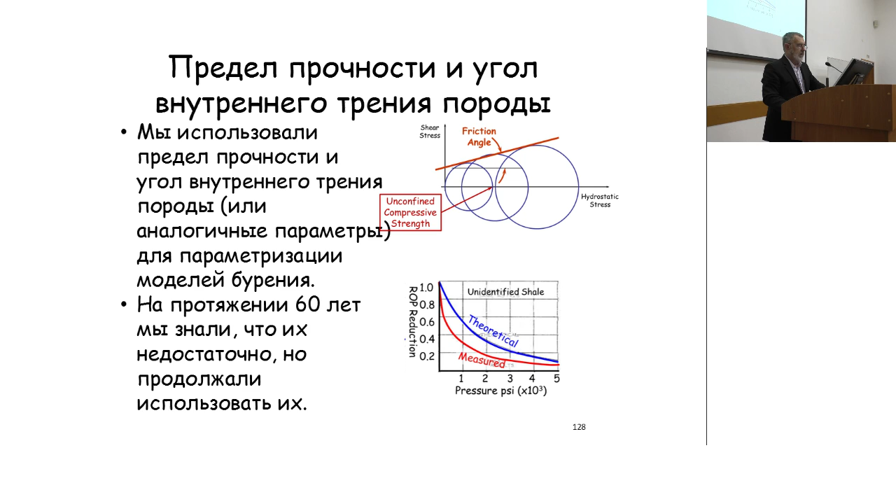So there's a big need today to understand what it is about the rock that we need to be measuring. It probably has something to do with the crushed material itself: the sizes of the crushed material, the angularity of it, certainly chemical issues would come in, the reaction between the cutting and the rock, and certainly the permeability of that. Those sorts of things are probably the way we should look in the future as we try to develop a more fundamental model.

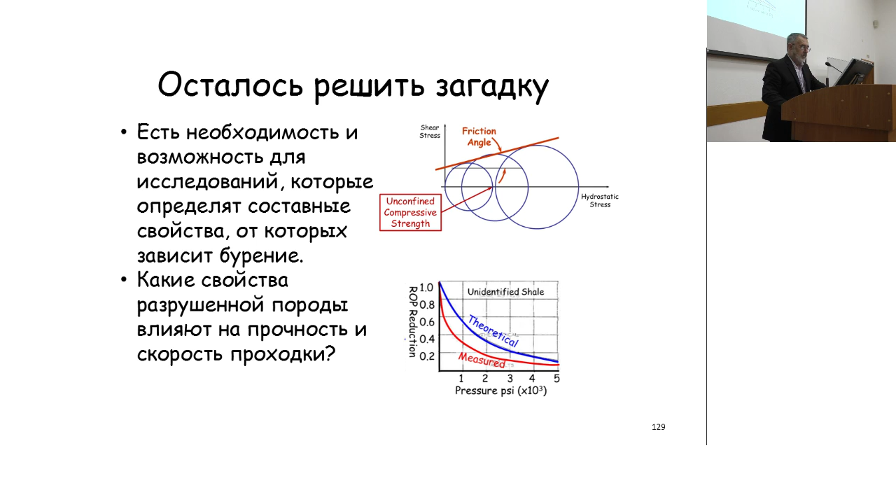So there really is, I think this says that we need fundamental models, and I believe that's what it says. But there's a need, and so even in a university like this, that's a very, very interesting question and a very real question for drilling that somebody needs to answer.